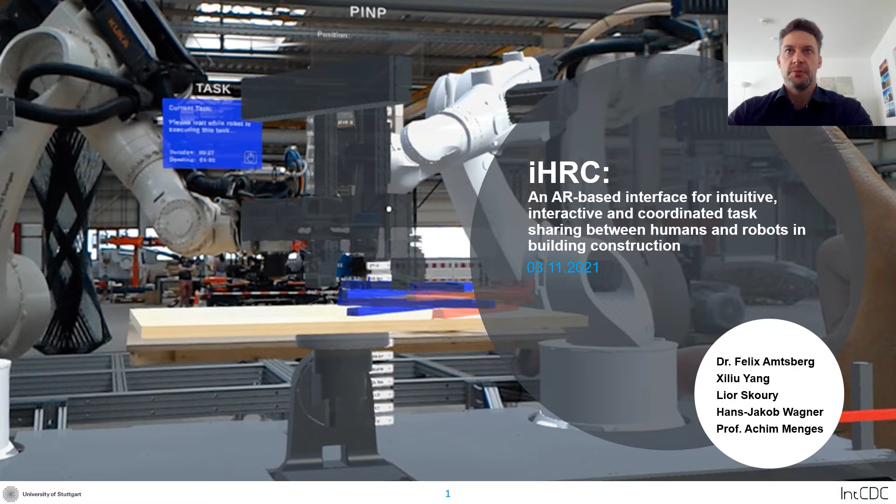I present instructive human-robot collaboration, an augmented reality-based interface for intuitive, interactive, and coordinated task sharing between humans and robots in building construction, a novel method for augmented reality-informed human-machine collaboration. We argue that enabling human craft to coordinate or take over specific process parts makes a significant increase in flexibility and robustness of automated workflows feasible.

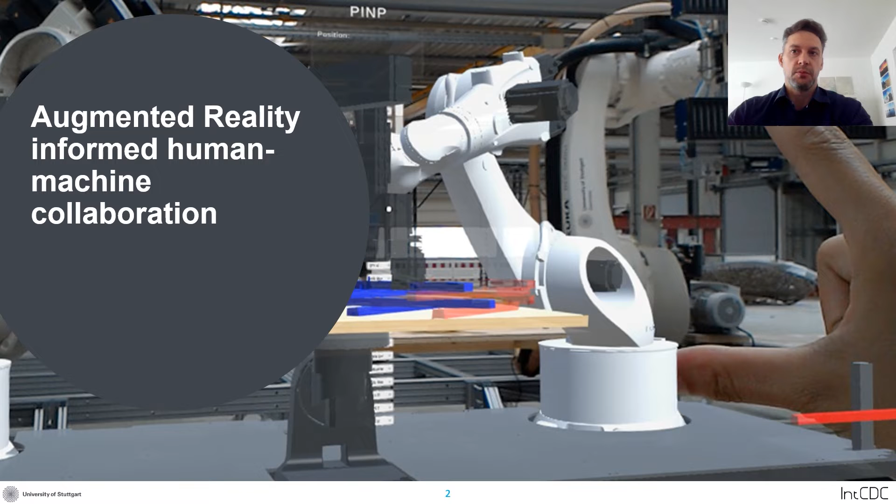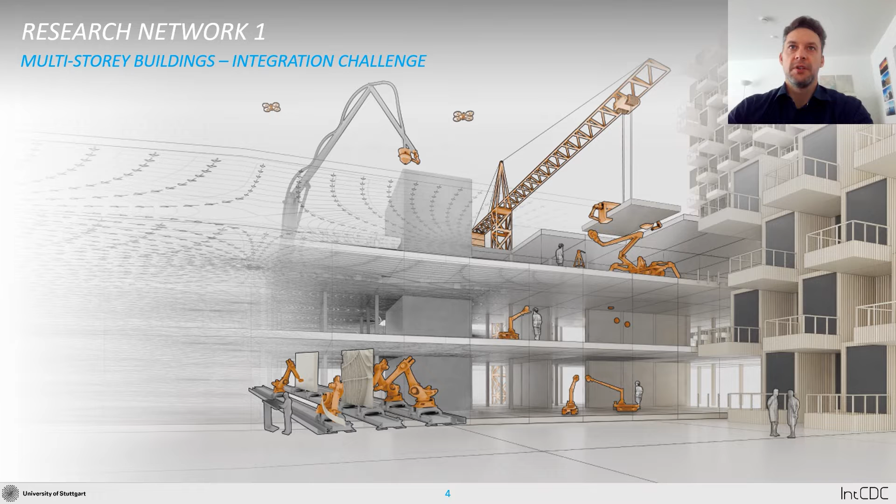I'm presenting this work on behalf of our team, working in the environment of the Cluster of Excellence at University of Stuttgart, the Cluster for Integrative Computational Design and Construction for Architecture. We work within Research Network 1, Multi-Storey Buildings Integration Challenge, and our team, consisting of architects, mechanical engineers, and computer scientists, works on Research Project 4, the Cyber-Physical Wood Fabrication Platform.

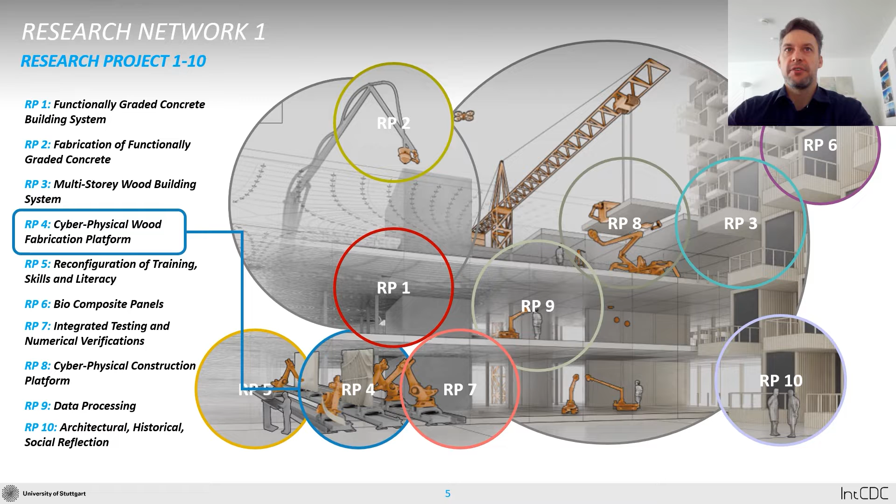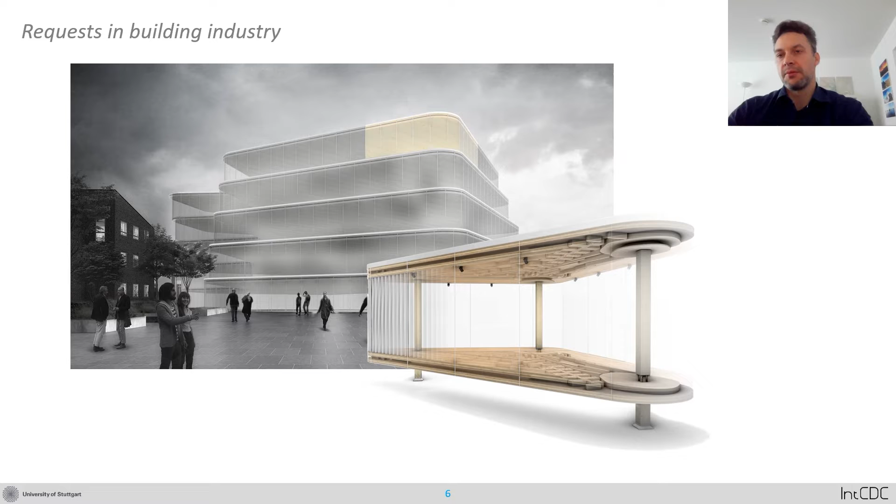One of the central aims of our research is to provide fabrication methods for multi-story timber buildings which exceed the current limitations of the state-of-the-art, where many buildings are designed on a modular logic that can be fabricated efficiently and with a high level of automation, but result in grid-based systems with a certain lack of flexibility. It seems, following the study of Bertram and others, that a much bigger part of the market lies in unique, complex, project-based buildings where higher flexibility in floor planning is requested.

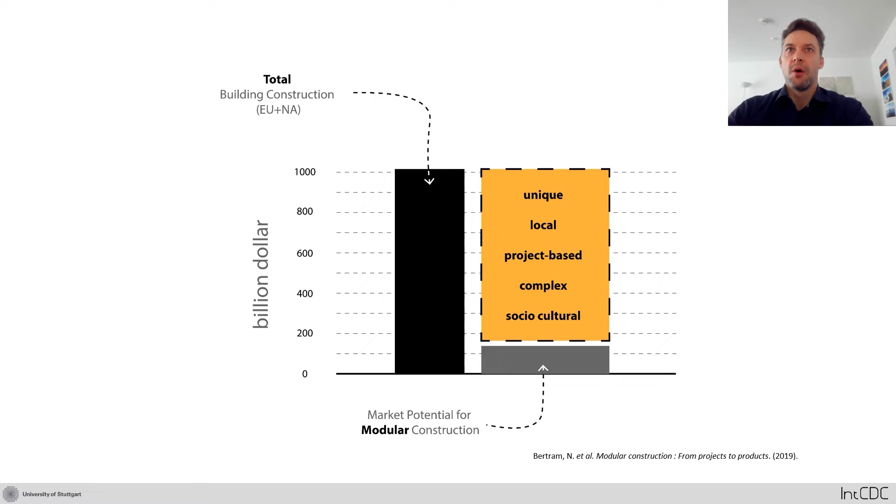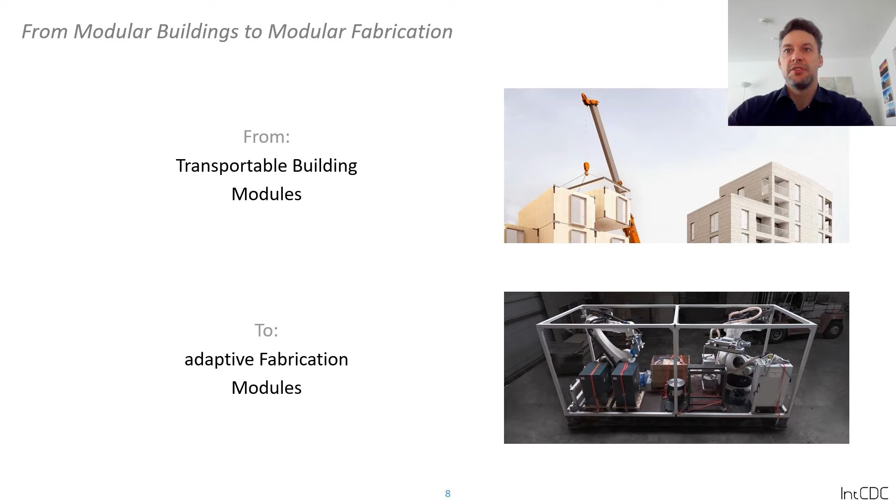This is why we switch from transportable building modules to transportable and flexible fabrication modules, which can even be brought on site to extend the capabilities of fabrication setups, and which can be customized for the individual demands of specific fabrication ideas. One way to do that is with the integration of human craft, not just to collaborate in the fabrication, but to instruct and control the robotic system.

The current state of the art, as presented by the International Federation of Robotics, defines a level of collaboration based on the proximity of human and robot and the responsiveness of the system. We see four levels of collaboration, called coexistence, sequential collaboration, cooperation, and responsive collaboration.

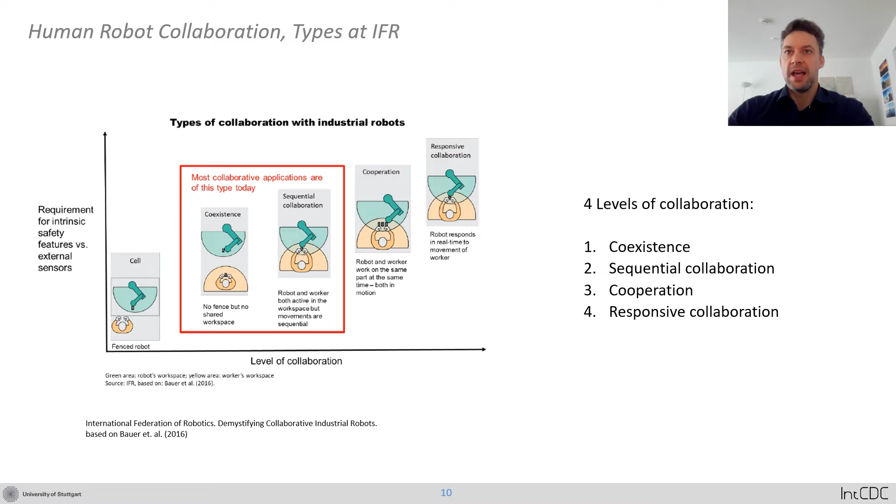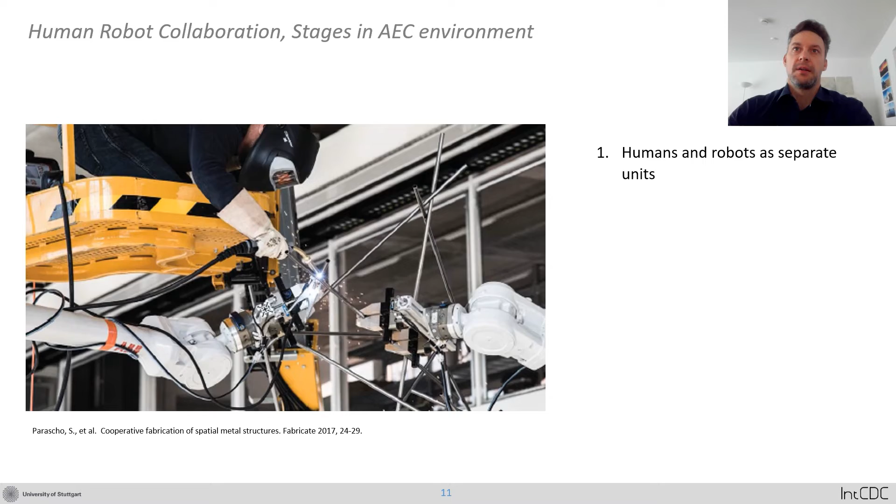Recent work in architecture takes a different approach and focuses on novel human-robot collaboration in experimental fabrication processes. For example, humans and robots work together but as separate units with no communication between them. Or, humans work as the instructor and the sensor-equipped robot executes the task as a smart tool. Or, as a third example, humans and robots collaborate as fabrication units, but usually with robots of lower payload and additional sensors, so-called cobots.

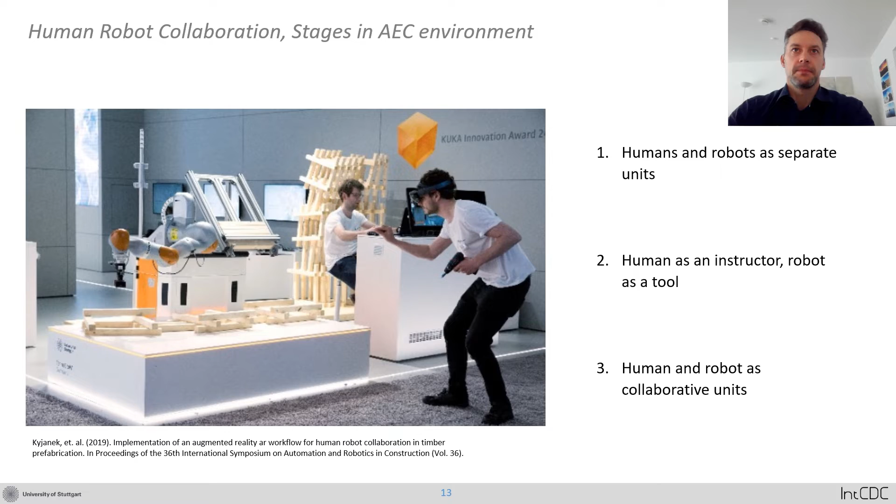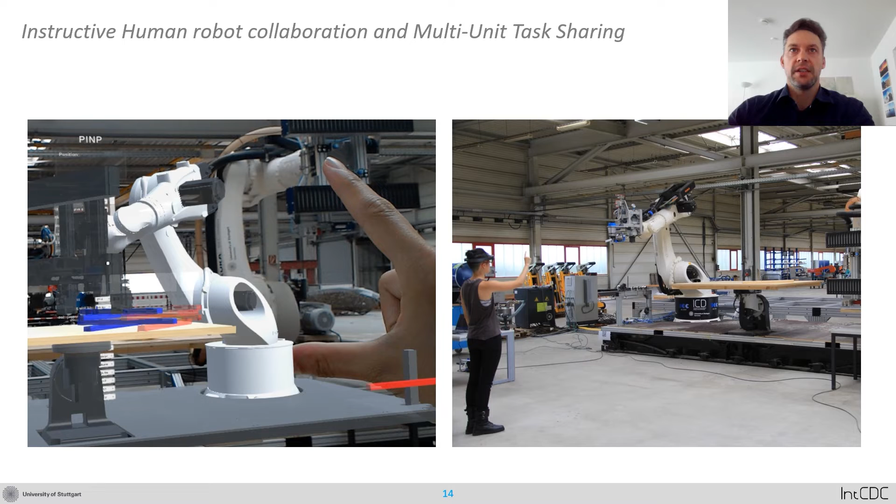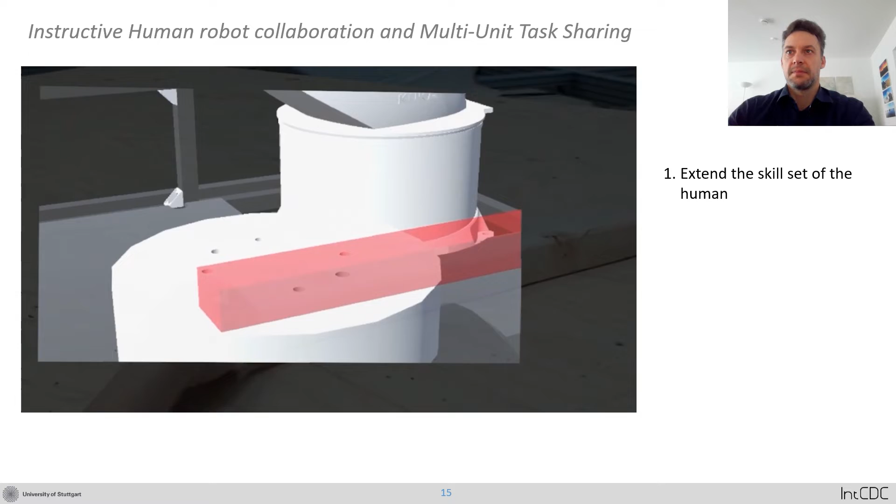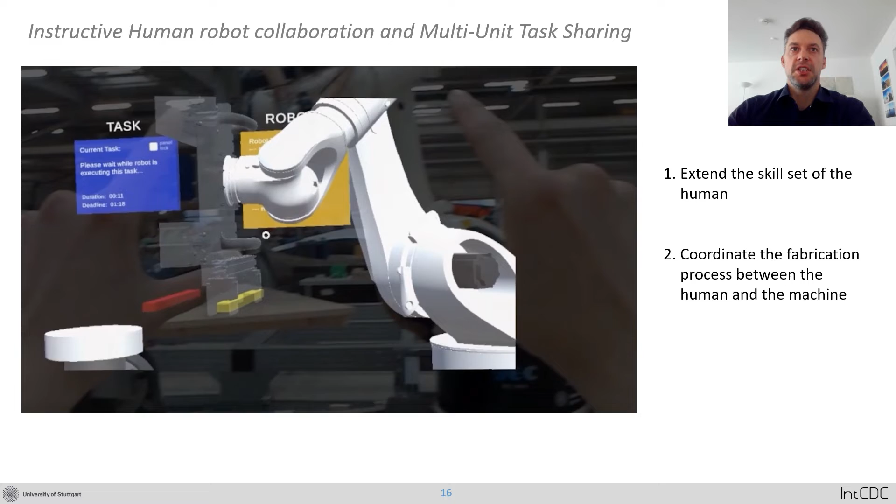With instructive human-robot collaboration, we integrate human craft and high levels of automation processes, and augmented reality technology serves us in three ways. Number one, to extend the skill set of a human. Number two, to coordinate the fabrication process between the human and the machine, as we can see here. And number three, to hand over the instruction to the human craft, who is not necessarily a programmer.

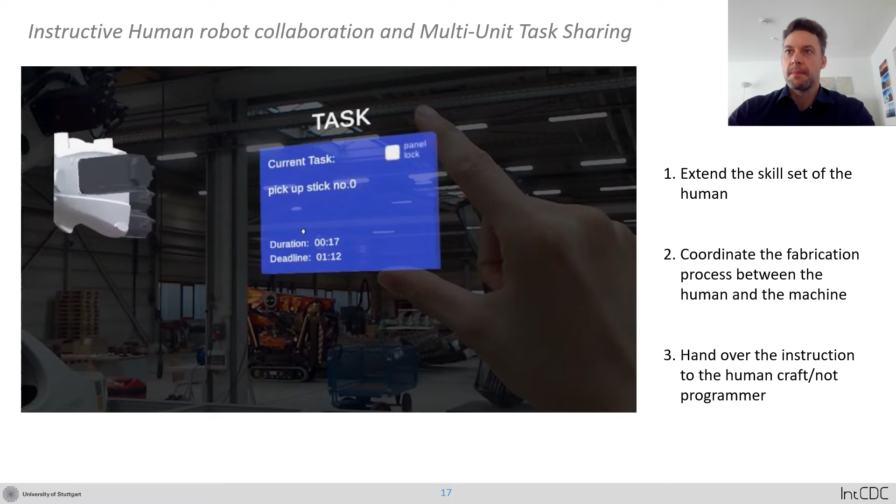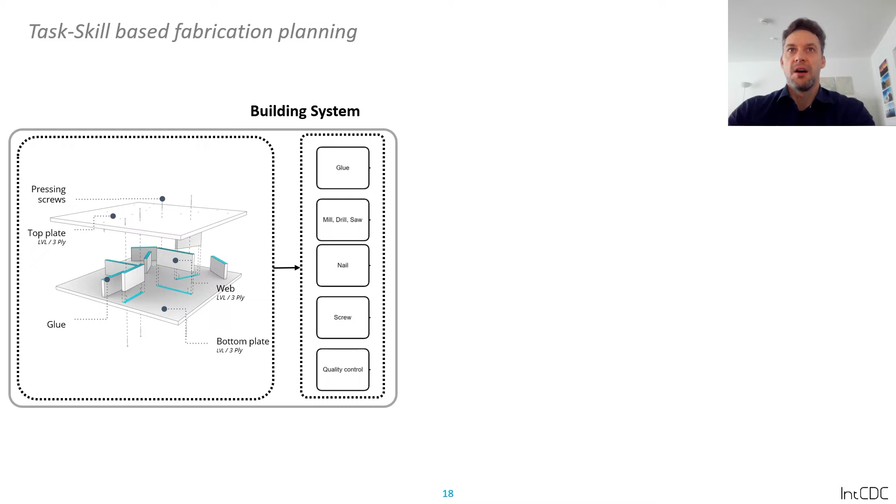Multi-unit task sharing is a method derived from the conceptual approach of task skill-based fabrication planning. In this concept, a set of tasks which must be executed to produce a specific building system is formulated. These tasks are compared with the skill set of adaptive, modular, and therefore flexible fabrication setups.

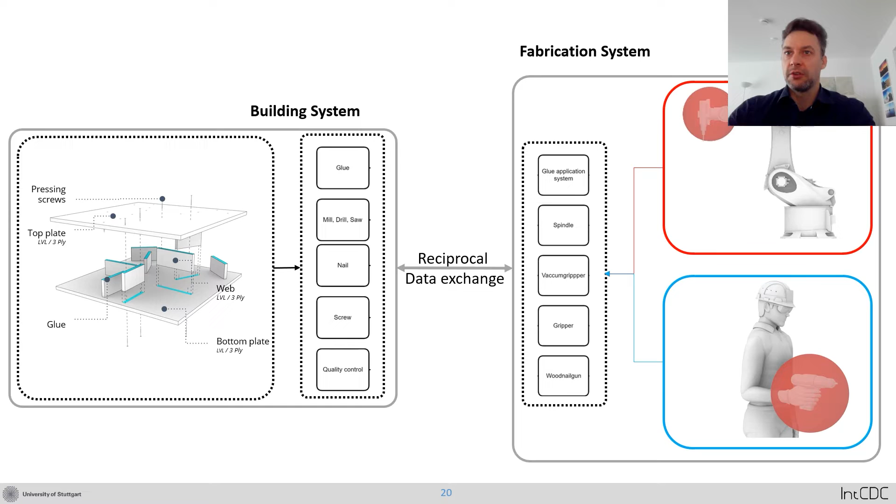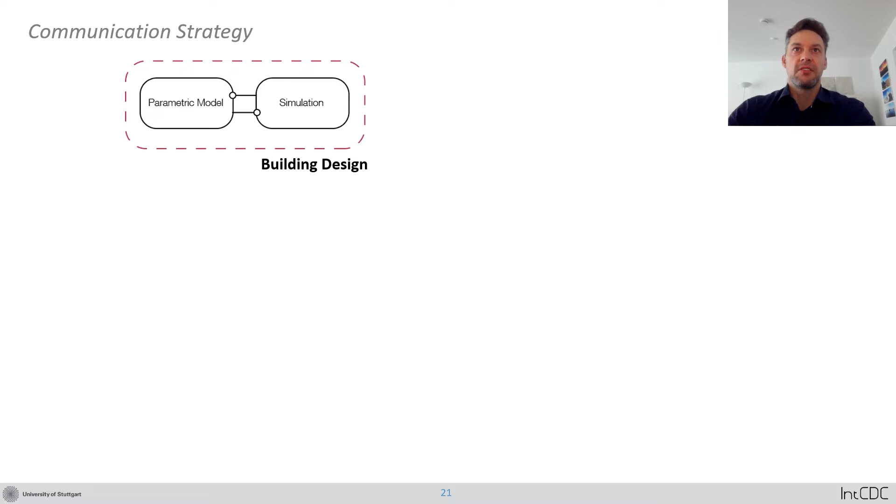Such fabrication setups can consist of several fabrication units, which can be industrial robots and other automated machines, but also human craft. This is how we facilitate the information flow from a specific building design to a fabrication system. It starts with a parametric model and a process simulation of the building design.

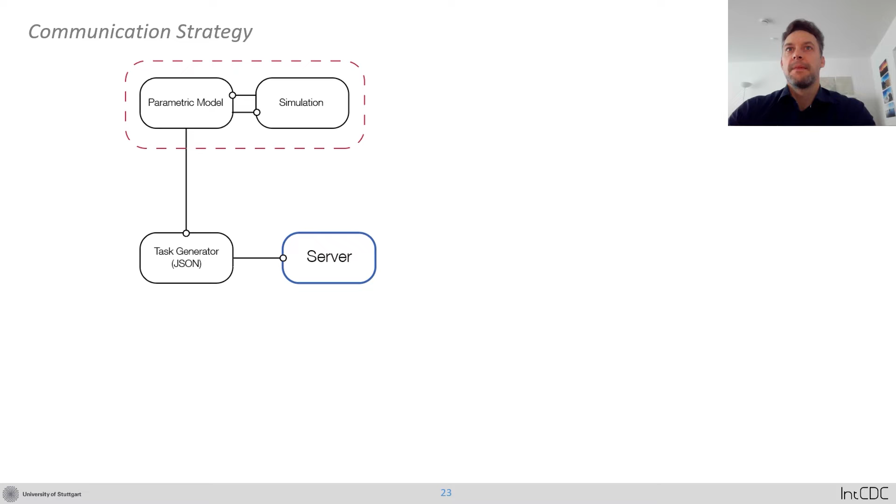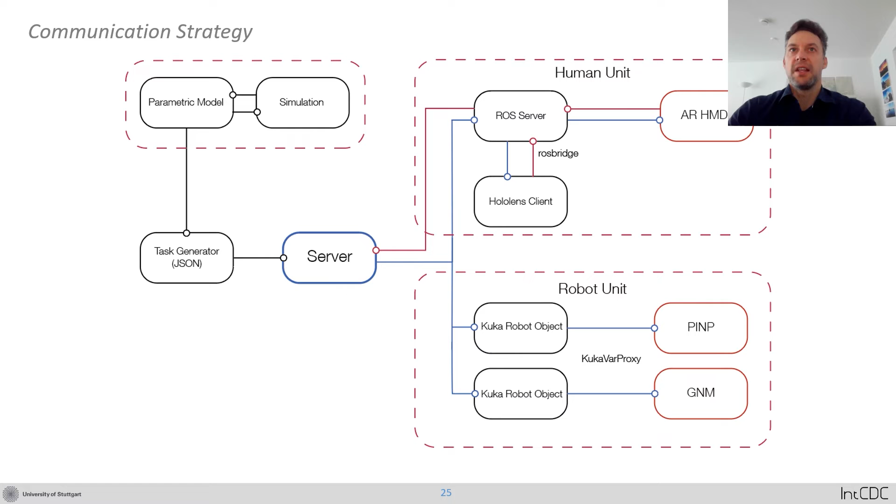A communication system is implemented through a server that can read the tasks and communicate the fabrication data to the units for execution, which can be received either by a human client wearing a head-mounted display or a robotic fabrication system, which in our case consists of two robots: the PINP, the pick and place unit, and the GNM, which serves for gluing, nailing, and milling.

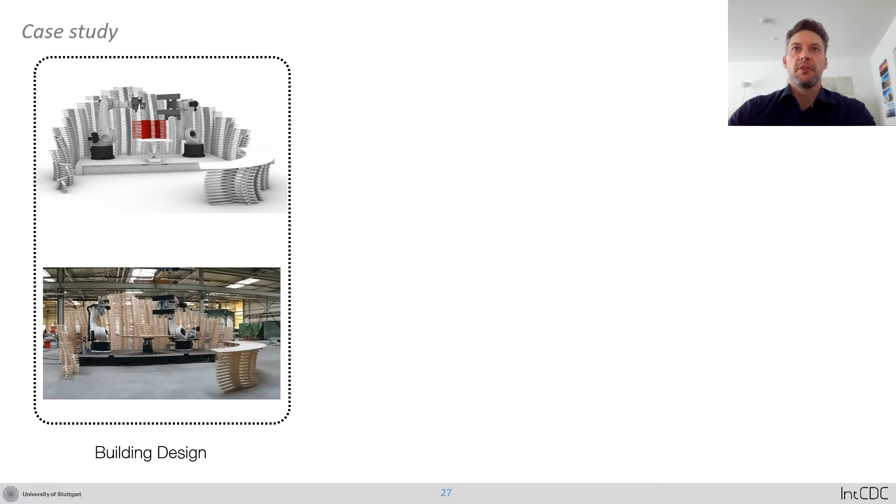We used this case study, a structure for a trade show stand which surrounded the timber fabrication platform, to test this approach. We start with a building design and define a list of tasks which have to be executed, for example the pick and place of the timber slats and the timber slat fixation.

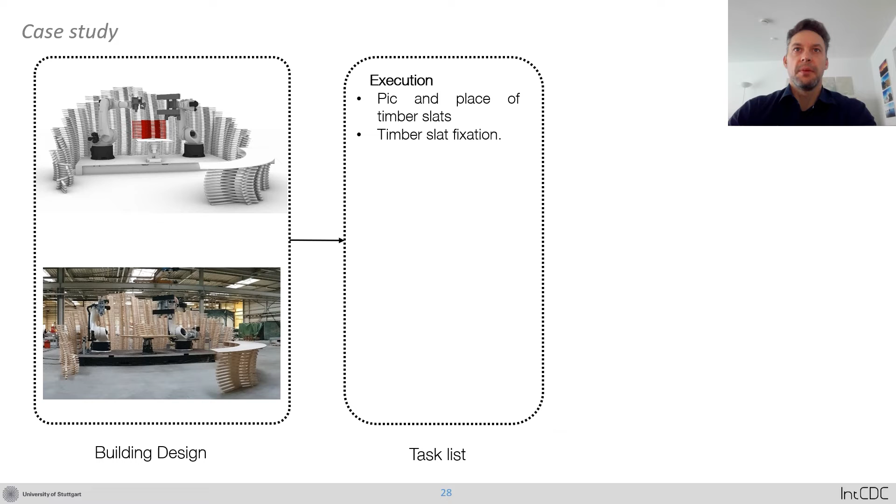Also the physics of the system, meaning we need a positioning accuracy of below plus minus 5 millimeters. We have to handle a weight of 1 kilogram plus the end effector, and we have to work within the confined workspace of 2.70 m by 2 m by 1 meter. Other crucial fabrication factors like speed were not specified in this case study.

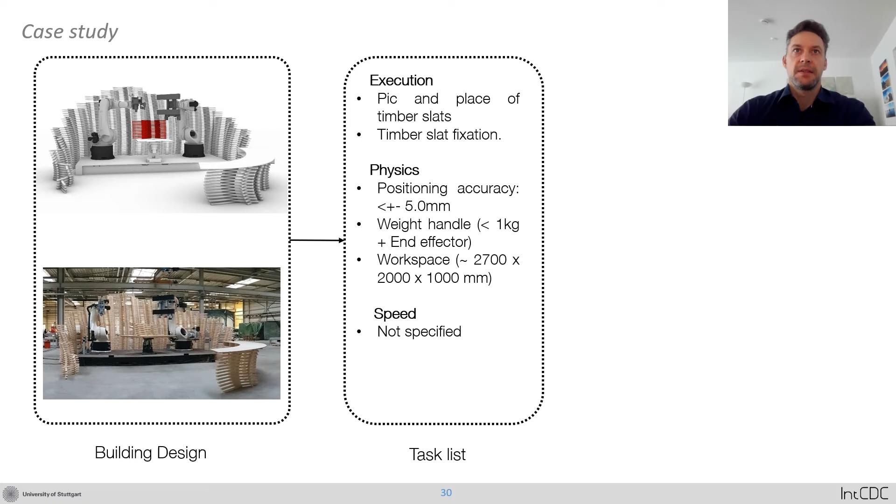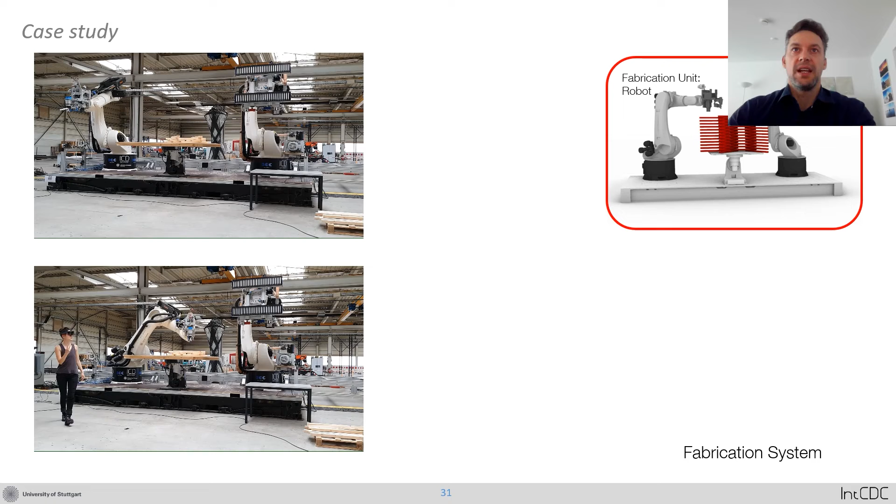Here we see the execution of the PINP robot picking and placing a timber slat and the GNM robot nailing the placed slats. The PINP uses a linear gripper and the GNM a wood nail gun for the execution.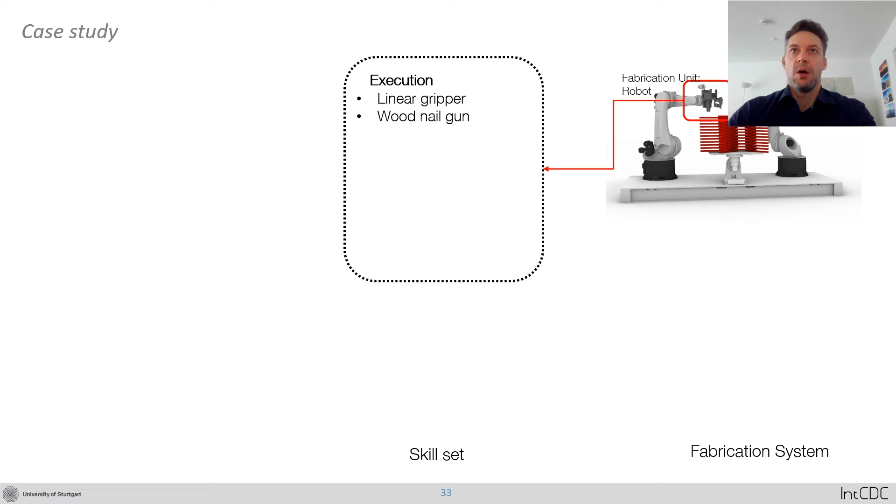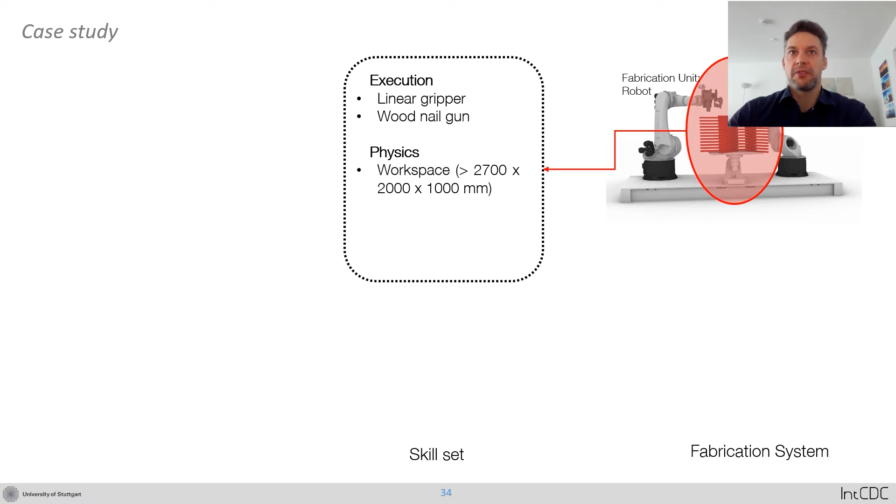All of the 51 clusters which generate the structure fit in the defined workspace between these two robots, and the robots easily handle the weight of the slats.

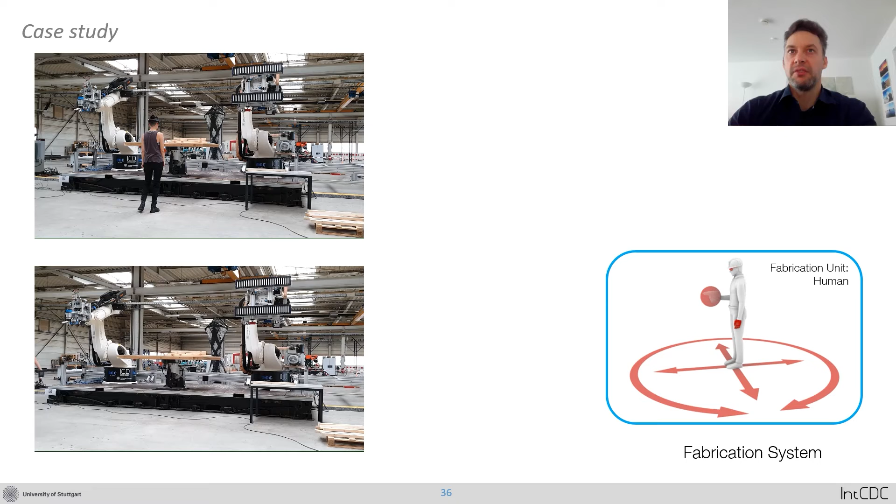Here we see the execution of the human picking and placing a timber slat and the fixing of the placed slat with a screw. This allows correction of the fixation task where the robot has failed, for example because of a split nail or an empty nail gun.

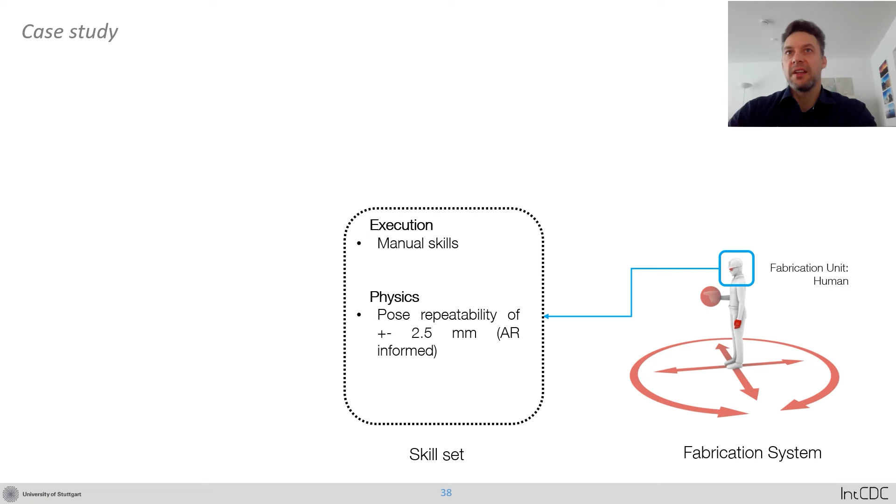The skilled craft, which is extended with the HoloLens, enables an accurate placing of the slats, and the electric screwdriver enables the fixation. The workspace can be reached and all slats can be handled by the human.

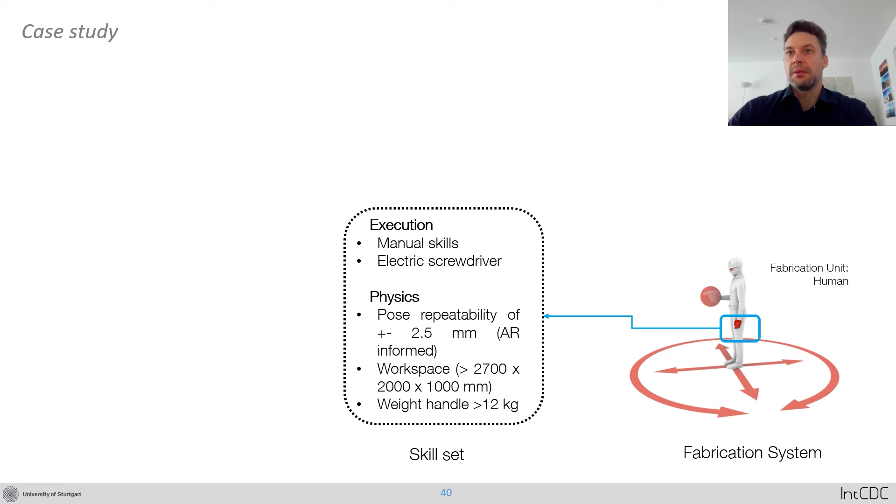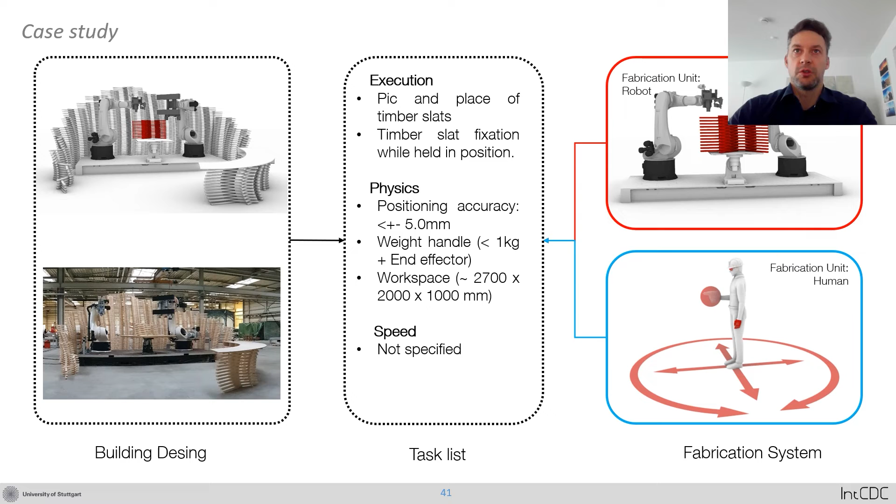So both fabrication units, human and robots, are equally equipped to execute the task, but only the human has the control and skills to correct if something went wrong.

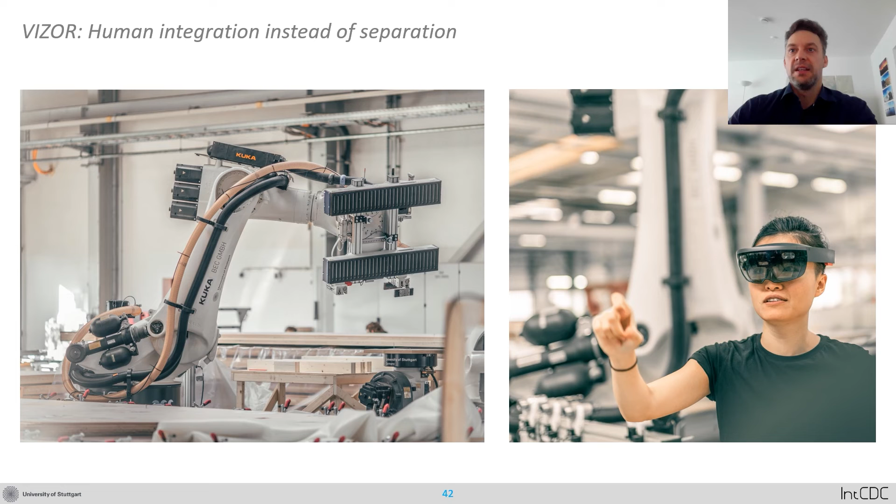With VIZOR, we developed a tool for crafts-controlled task sharing, meaning that it enables assigning tasks to humans or robots, but also enables the human craft to control the fabrication workflow. Again, this can be an unskilled worker with no programming experience.

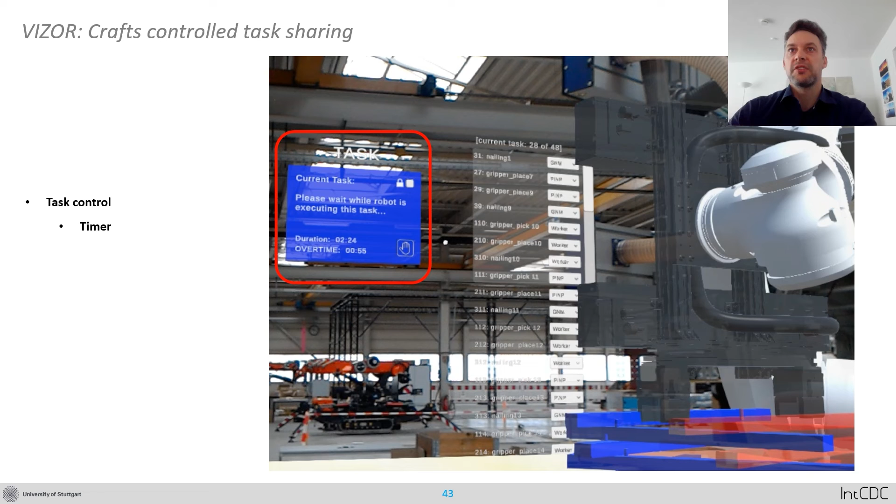Here we see the main components from the perspective of the user. The task window, marked in red, shows the state of the fabrication. A timer is running and can be used to control time-sensitive operations, like gluing, among others.

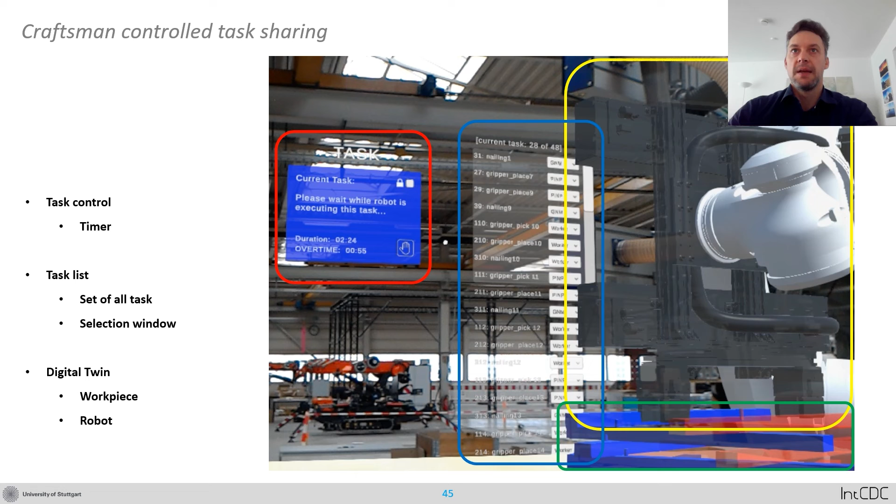The task list, marked in blue, shows the set of all tasks and a selection window with the units these tasks are currently assigned to, but which can also be changed. And the digital twins of the workpiece in green and the robot in yellow can be visualized as well.

Let's quickly recap while we have the fast forward video showing the cooperative fabrication process.

With instructive human-robot collaboration, the developed setup introduced the first step into a new level of human-robot collaboration. The interface and communication strategy developed in this research successfully transfers the supervision and direct control of heavy payload, multi-axis fabrication setups like the one that we see to the human coworker.

The coordination works fully hand gesture based and requires no understanding of robot coding. Additional information like the digital twins of the module augment the human skill set.

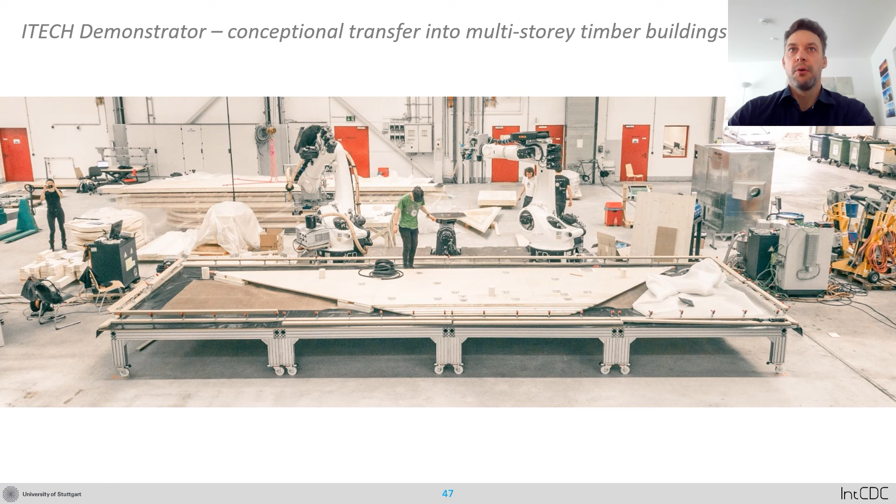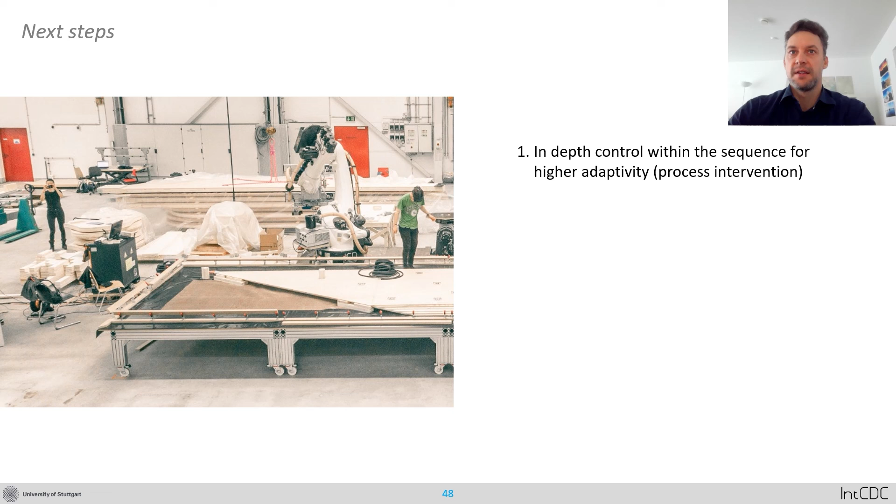Currently, we are testing the setup and the fabrication of a new building system where several new points are under investigation. Number one, in-depth control within the sequence for high adaptivity, for example for process intervention. Second, the development of a generalizable ontology for more complex fabrication setups.

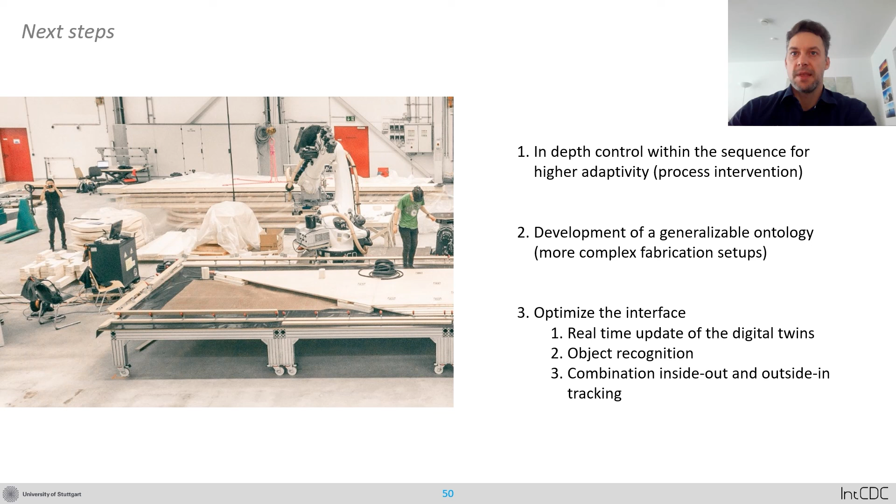And third, the optimization of the interface with, for example, real-time update of the digital twins, object recognition, and combination of inside-out and outside-in tracking systems.

With this short outlook, I thank you for listening, and now I'm looking forward to your questions or comments.